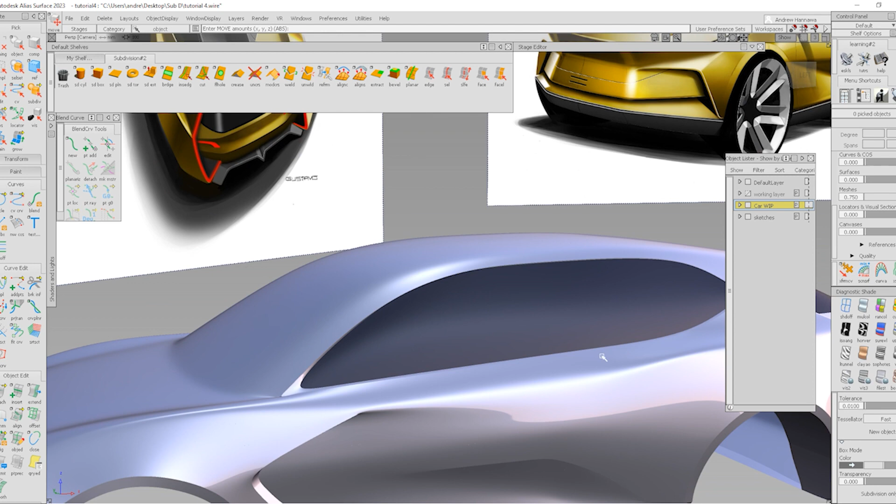Today we're going to add more detail to this model. Now that we have the front, side, and rear blocked in, it's time to add more details. I want to clean up some of the surfacing around this C-pillar sail panel, add this V-shape feature onto the spoiler, and maybe if we have more time, we'll split the glass from the body and add more detail and clean it up a little bit.

Okay, let's start with this sail panel here. If I look at the sketch, it goes to a point and then into more of a round shape here. And if I look at the other one, it does something a little bit differently, kind of goes all the way.

I'm going to follow a solution where I combine both sketches. So let's start, first thing I need to do is...

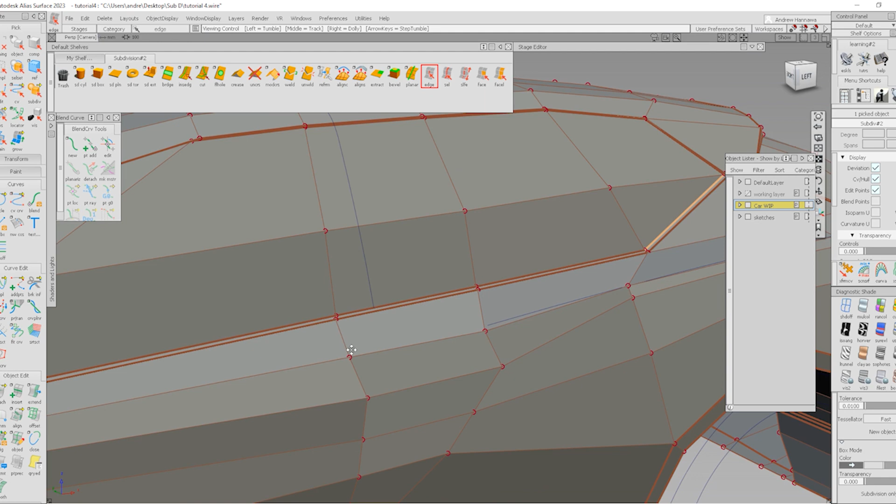I'm going to start unwelding some of these edges. I'm going to unweld this one, and I can unweld this one. First I'm going to just separate these faces from each other. So I'll click on the edge, then click unweld, and that's going to unweld those two edges.

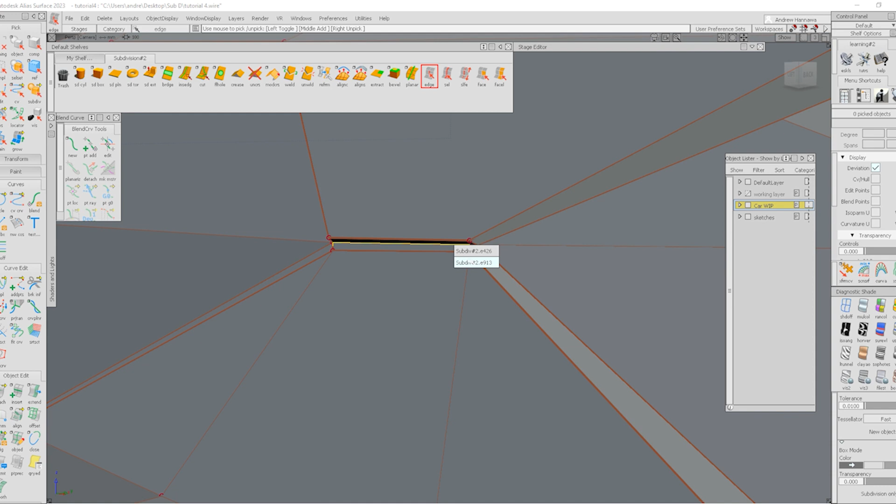And then I can unweld this one as well. Yeah, that's unwelded. And this one can stay. Actually, we need to unweld this inside one right here. Actually, I can delete this surface because that's just a connection between those two, and I can just delete that one. Oop, it doesn't let me. So yeah, we might have to unweld.

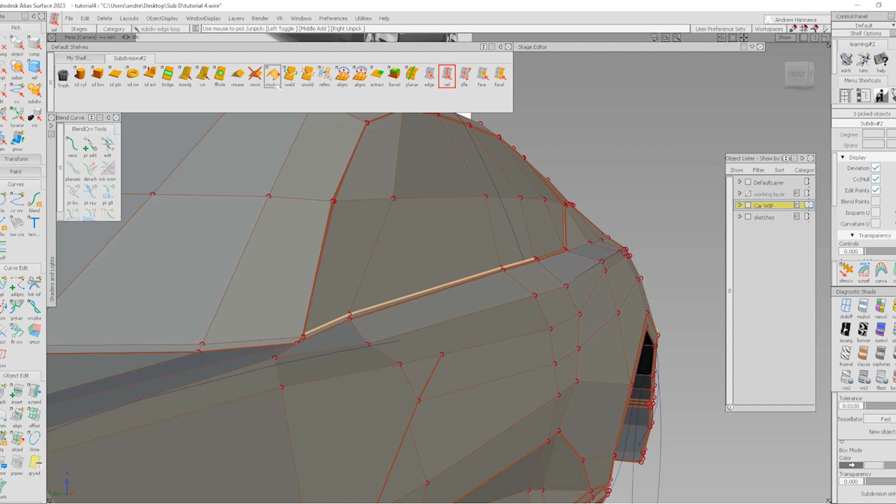Okay. And then I can unweld this one as well, this whole edge. Let's see what is left here. What if I go in here and crease this right here. And I can take this guy here, unweld that, and then I can unweld this one, and let's unweld all of this.

Okay, I can delete this edge loop, don't really need that. Alright, that is not what I want to do. Just delete this one, and then delete this one.

Now I'm just cleaning this up. This one here could go from here to here. Then I can get rid of this one and this one. Why is that not—oh, that's just that one. Okay, then I can crease this one.

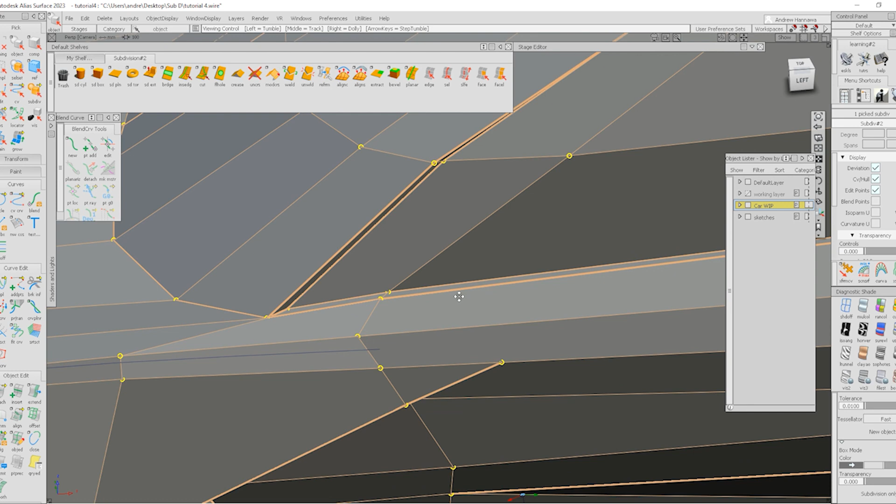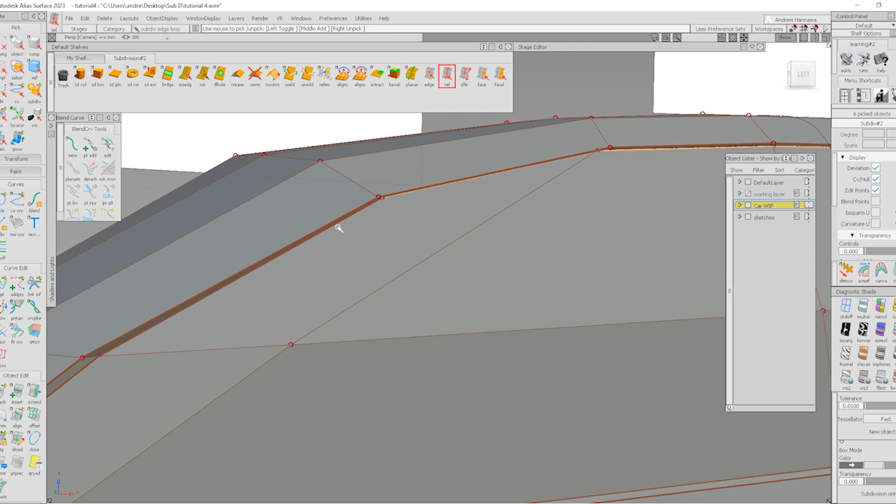So let's see what actually is still welded together. I'm trying to separate this so it's easier to work with. And then I can unweld this guy and this guy. Okay, that should go all the way there. Unweld this one. Okay, that is meeting with this one, which is unwelded. And there we go, that is now its own part.

Yeah, I can hide it for now. And then I can go in and select this edge loop right here, and I can unweld that as well. And that is now its own part. So if I look at this and this, now the glass is its own separate part. The reason why I did that is to help me get this part to be cleaner.

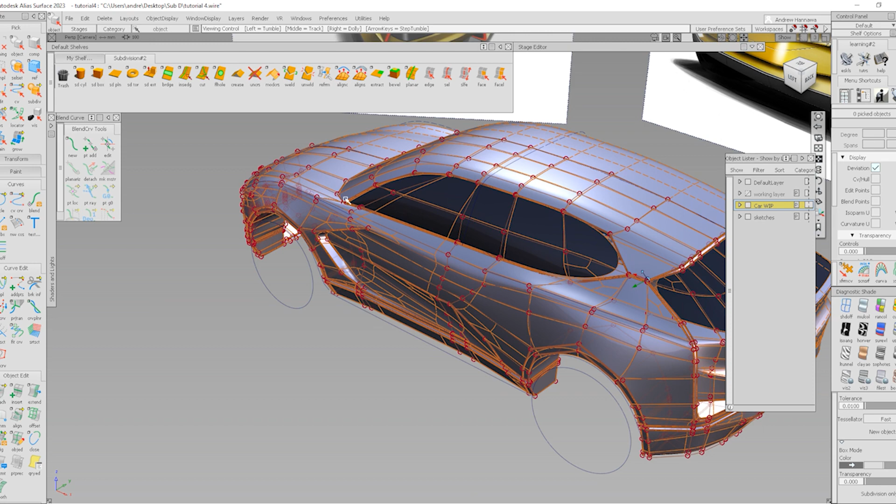So what I'm going to do now is work on the body. This part is not yet unwelded, but I can unweld it. I think this edge is not unwelded. This should be its own part. Yep, this is now also its own part. So now I can work on the body separately while I keep the glass clean.

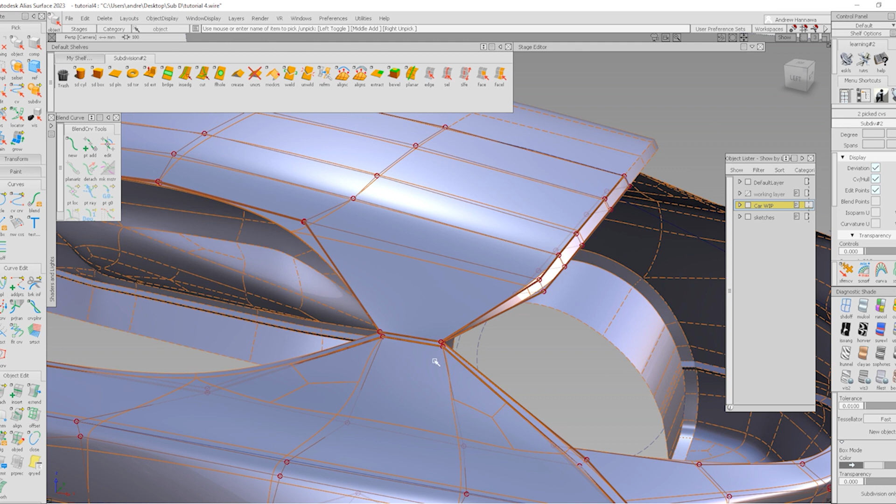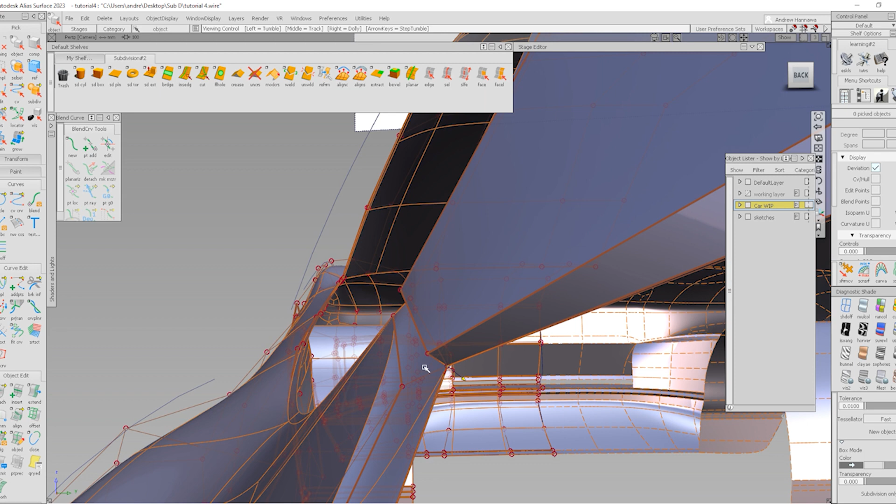Okay, that is strange here. I can push this down. I don't know what happened there. But okay, so first thing I'm going to do is start working on this sail area. Now I can add more shape here. I'm going to select this edge loop and then uncrease it. But because it still comes to a point here, this point wants to stay sharp while this one becomes more soft. So what I'm going to do is select all of this.

It shouldn't all get selected. I'm going to delete this face first. And now I can select this edge that connects to the bottom one, and then this one. And then I can select all the way down to this one.

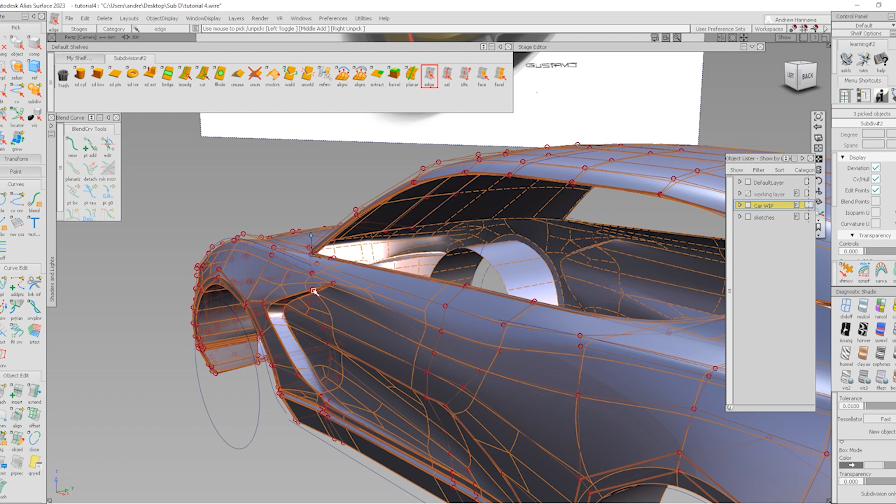And now I can extrude in Y and just go in like that. It doesn't really matter as long as I hit the glass, which I should be. And then I can crease all these edges over here.

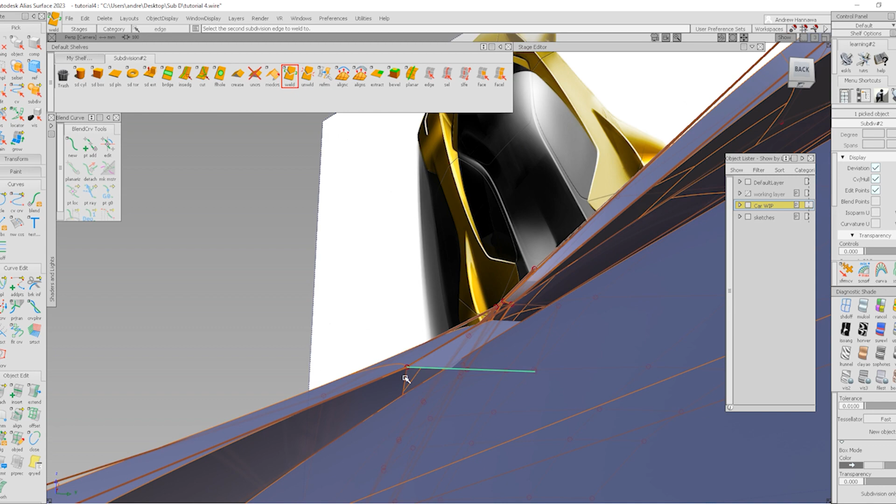Okay, and now I can weld this edge back to this one. So I'm going to select this edge. Oops, that one, and then I'm going to weld it back, this one to this one. Okay, and that should give me something like that. If I bring the glass back, it should look something like that.

Actually, I can connect the glass together now, so that doesn't leave a gap over here. So I'm just going to insert an edge loop right here.

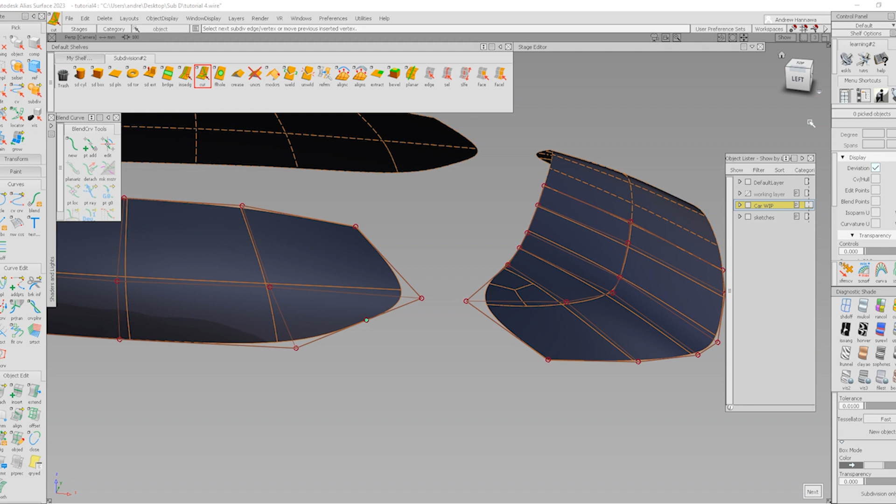Okay, and then I can just create a four-sided face, and I can push that to place, and then I can do the same thing here, create a four-sided shape, and I can also do the same thing here. Now I can connect this one, this one, this one to this one, and then just bridge between those.

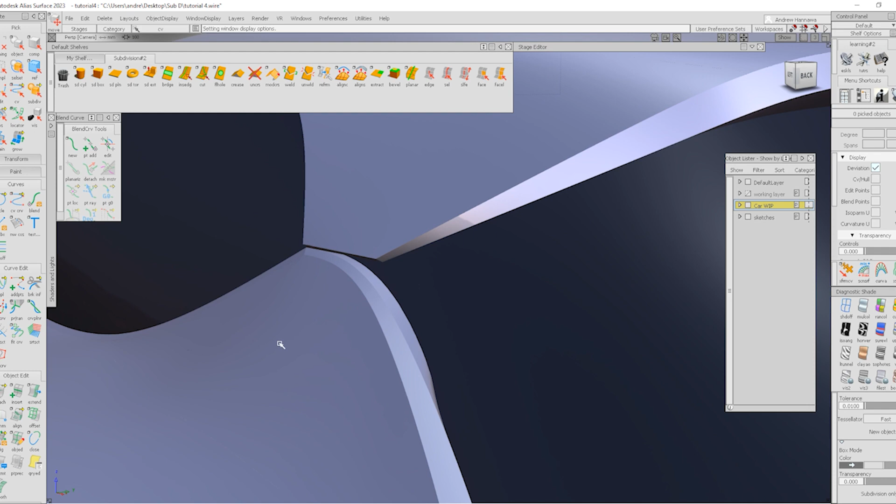And just like that, I bridge between my glass. I can push this point in so it's not protruding. And now we don't have a gap like that over here. Okay, we can push this point further in.

Okay, so that intersects the glass. Yeah, we want to be intersecting the glass.

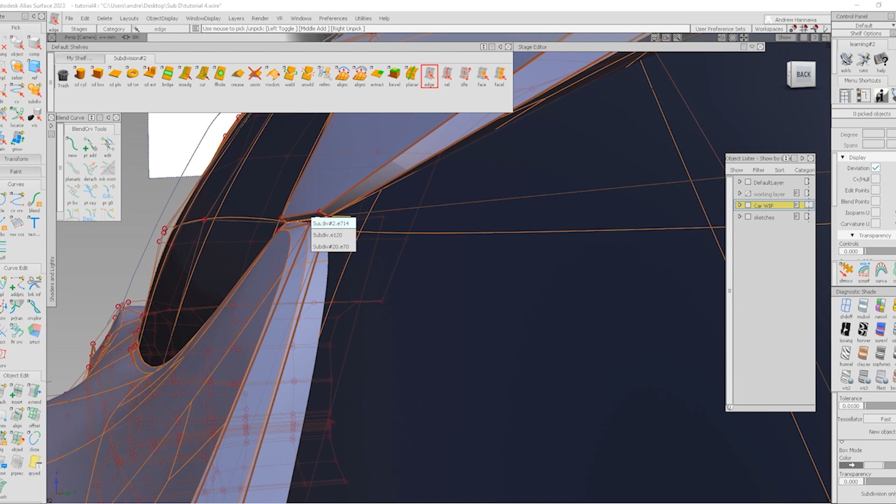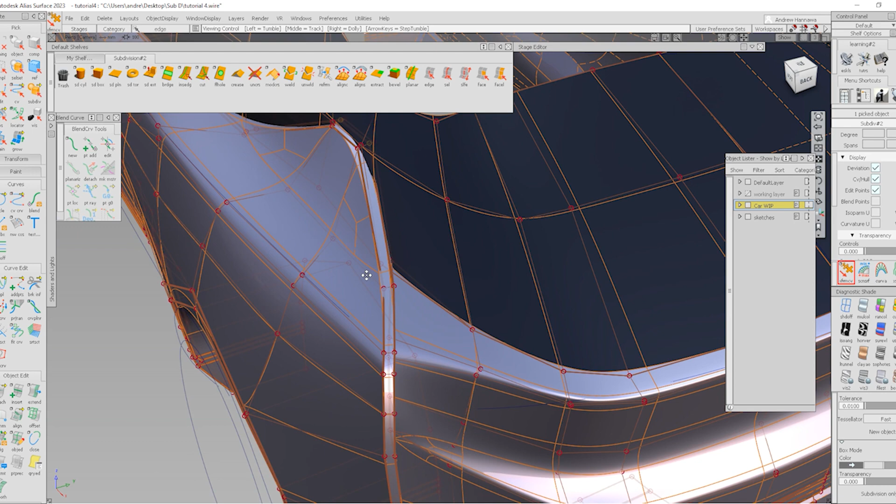I can hide this one so I can select better. And I will now move this one inside so that it intersects the glass. Pull it like that. Okay, that's better. Okay, and that I think is a little bit too soft, so I can just insert another edge loop right here.

And then I can move those CVs to get it closer to what the sketch is doing. Okay, that is starting to look better. We can fix the plan view now. Move that inside a little bit. Okay.

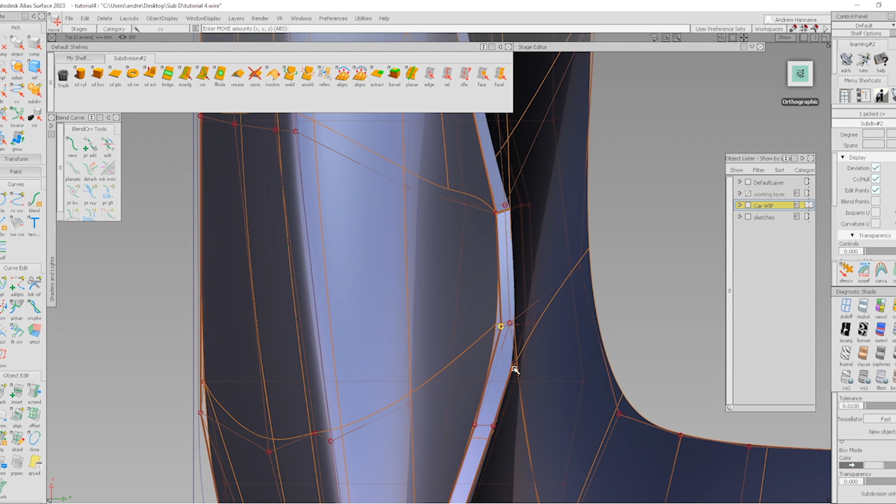Okay, now if we bring in this, it looks like it just intersects it. So, gonna do that now. I can grab, well, let me turn off this one and this one so that the CVs are not in the way.

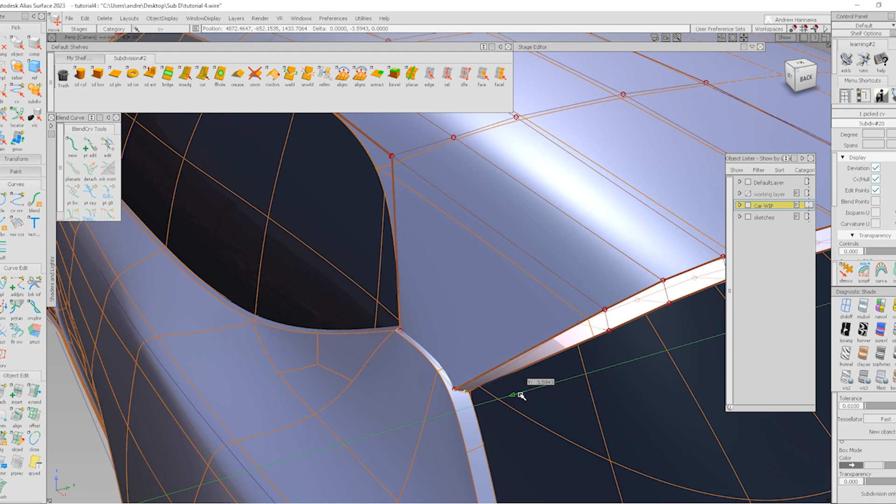It comes off and it just intersects it just like that. Same thing here, and then just intersect it like that. Can push it a little bit in Y. Push this point in. Okay, that's like that.

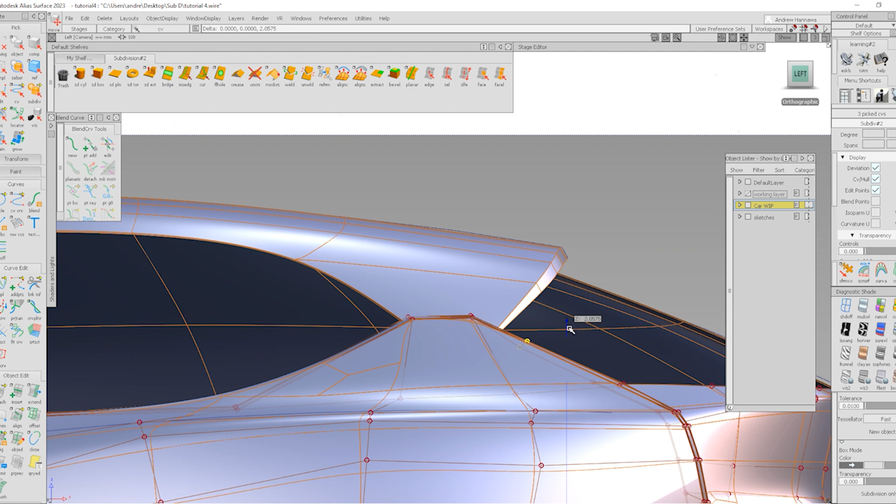I think the sail needs to be a little bit bigger too, so I'll turn off this one, and I can turn off the body, and I'll push this one a little bit up to create a little bit more, make the sail a little bit bigger, more substantial.

And I would have to move it in a little bit too. It's starting to be too thick. Remember, the glass curves in as it goes higher.

One thing I want to adjust here is this slope here. Looks like it has a little bit... the sketch has a faster shape, so I can just move this one using the slide tool. Get a little bit of a faster shape out of it. And then do the same thing for this row of CVs.

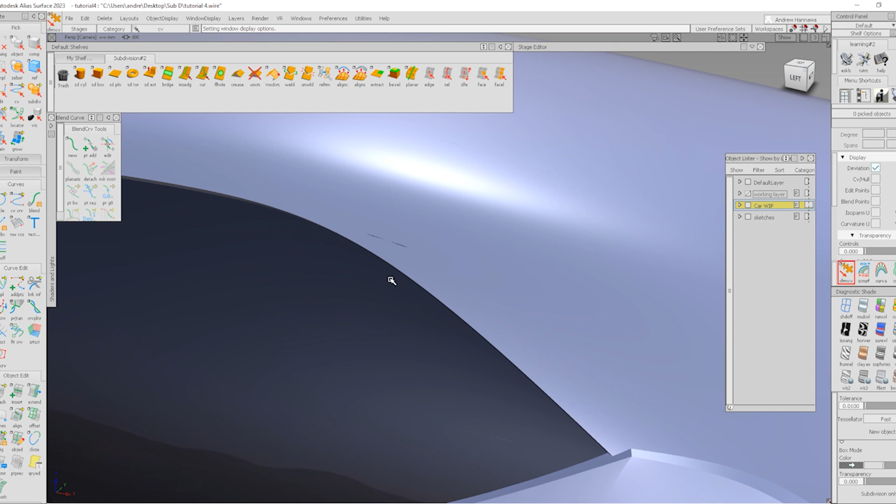Okay. How's that? That's looking better. My glass can move in a little bit. Okay. Alright, yeah, I think we got the sail looking a little bit more accurate to the shape of the sketch.

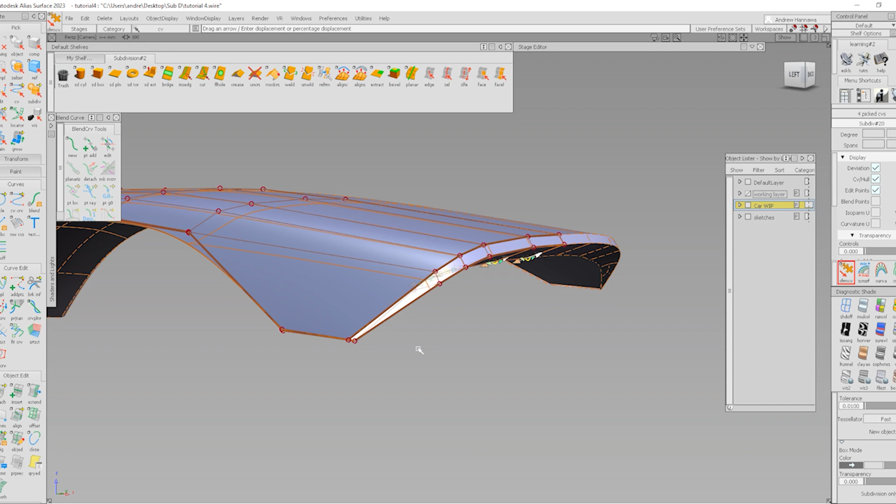Okay, now we can add this V shape. And this V shape is actually pretty easy. All we have to do is bring in, we can leave this inside part the same, so we can actually extend that kind of to go further into our glass, and then we can just change.

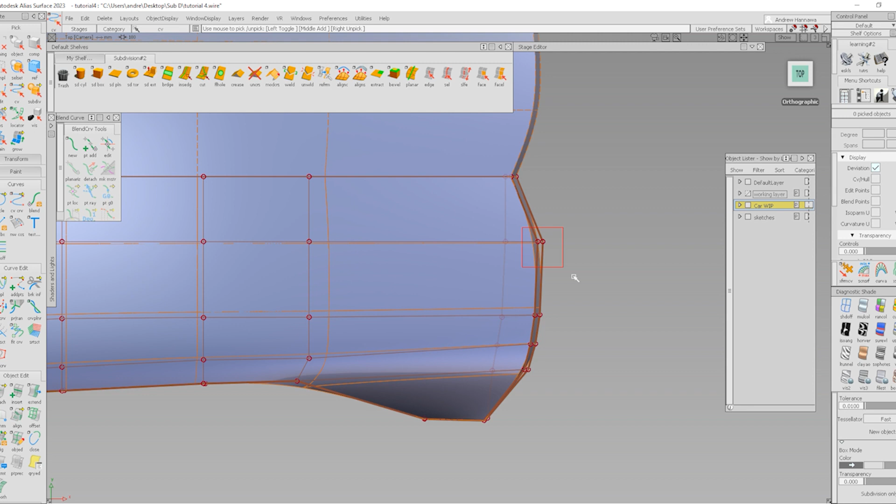Now we can actually break symmetry. Remember, we had this edge loop being the symmetry edge loop to keep it curvature continuous through the center line. We can break that because our sketch allows us. This is one of the rare designs that lets us do that.

I'm actually gonna crease this line here to create our rail. So yeah. And here I'm just gonna try and get more of a straight line, just like the sketch is doing.

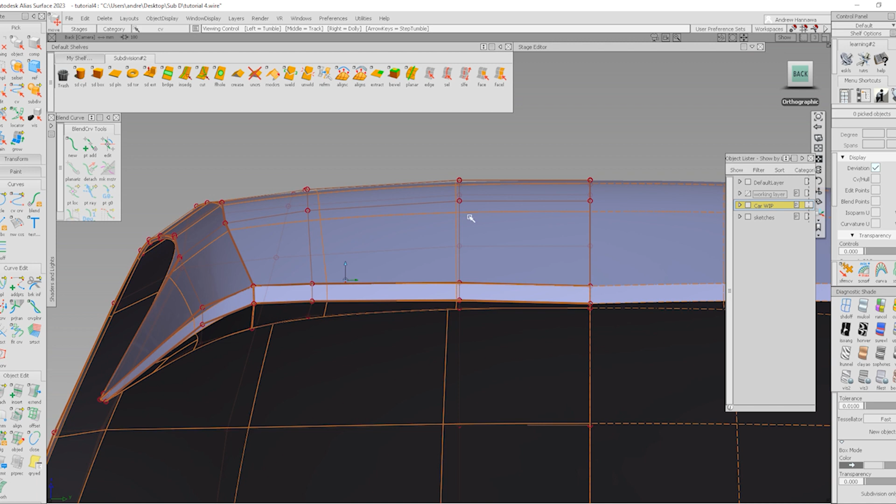Then I can do the same thing in this view. Select the CV, these two CVs, and just push them down. Do the same thing here. And these two as well. Can also, let me see how that looks.

Yeah, it is intersecting with our glass there. So we can actually push the glass down too.

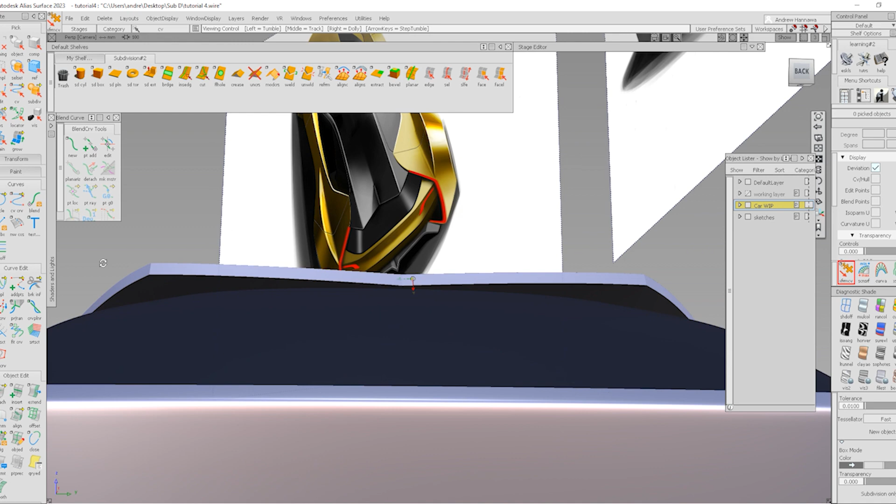I'm just hiding and unselecting so that it is easier for me to work, so I can see better and select the CVs a little bit easier. That's what I'm doing. Okay, that looks better.

Maybe move these CVs as well. I can go in a little bit further, push these CVs down to get that crease to travel a little bit more.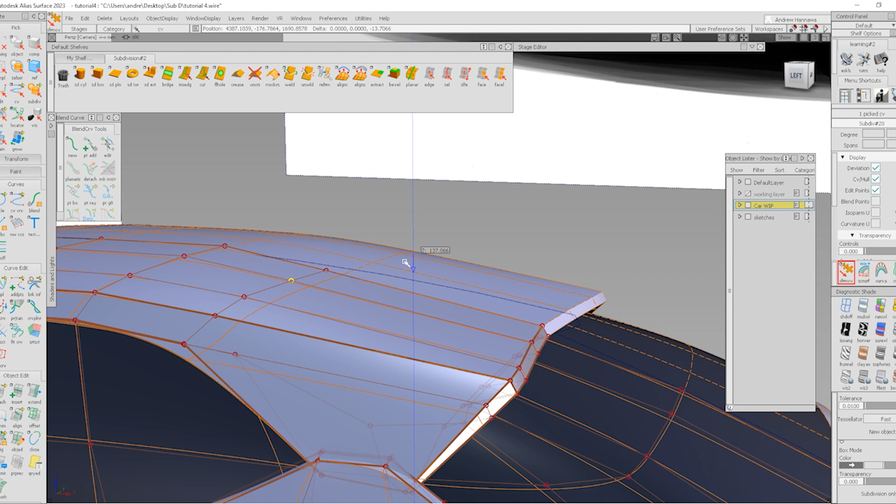Let's see how that looks. Yeah, that's better, looks more like the sketch. It just kind of fades out.

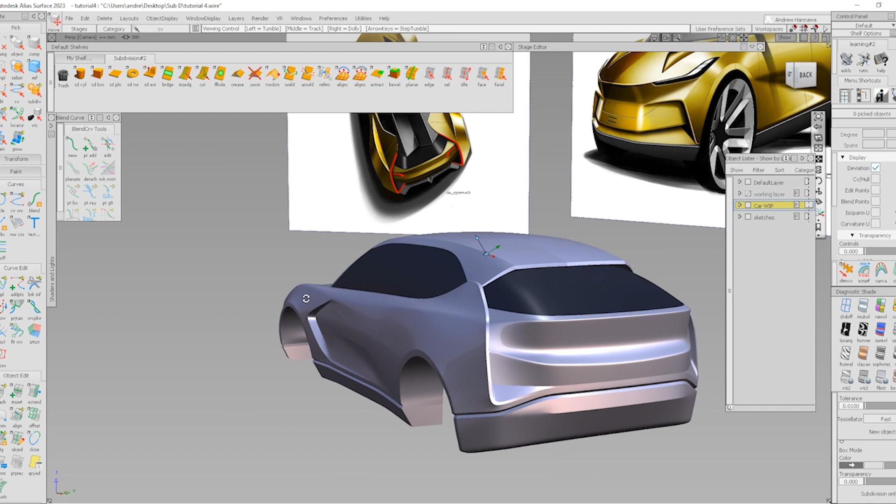Okay, so it looks a bit flat through here. So I'm going to isolate that, and then add an edge loop here. Then I can select these CVs and crown it just a little bit more, to get a little bit more of that crown shape we had in the roof, because it is starting to look a bit too flat.

That is looking better. We can use these edge loops later to control more of the crown of this surface. But for now, we can select these surfaces here on top, and then turn them into glass color, just to help us visually.

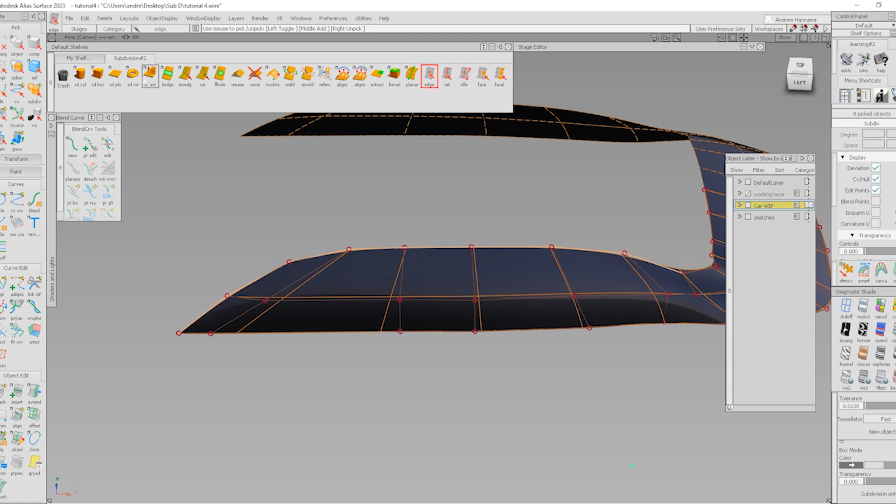If I look at my glass, it looks like it is protruding here. So to solve that issue, I can grab these edge loops here, hold shift, middle mouse click to drag select, and extrude in Y, and increase these surfaces, and now I can get that round shape back. This isn't necessary, it just helps us see that the glass is not protruding.

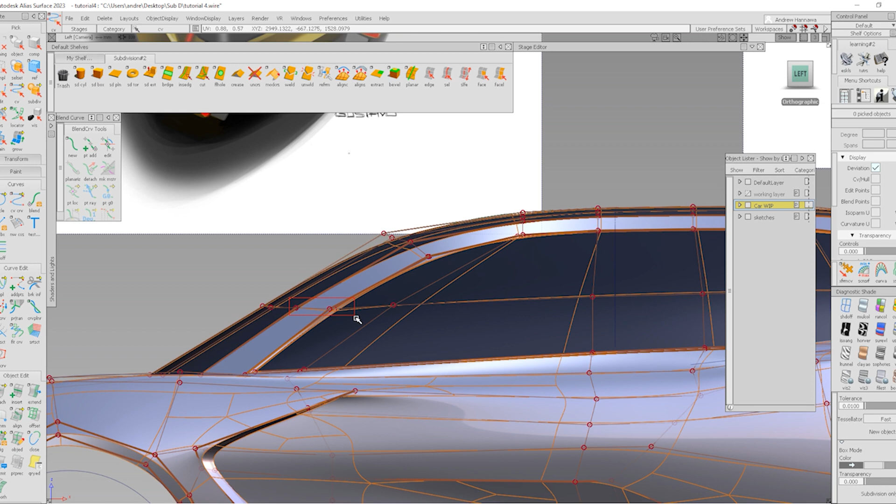I can adjust this a little bit. When I'm doing work for the body side or this rail, I want the glass to be selected as well, so I can drag select all of these CVs together, so that I'm affecting both and the shape stays close.

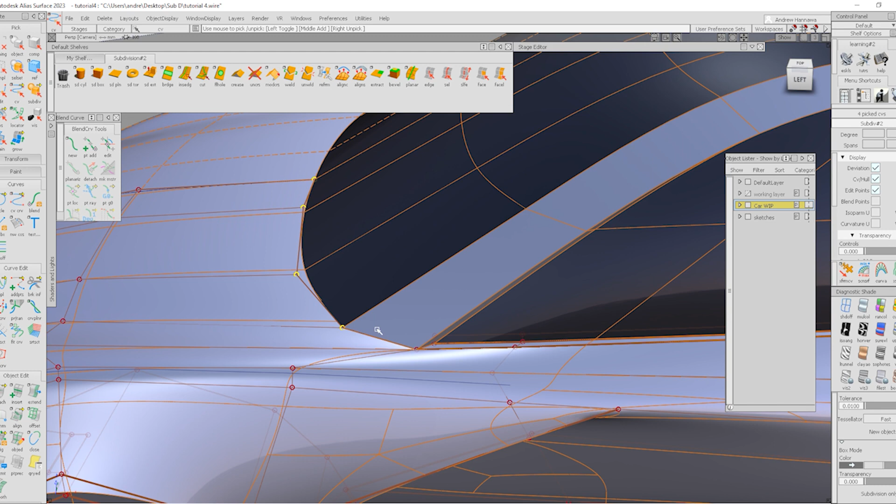Now I can turn off this and this, and either isolate my body side, but if you don't want to isolate, you can just work while this is visible. I'm going to select these CVs over here and drag them away. This is to create the cowl area.

I'm actually going to isolate now, and select all these CVs, because this is not supposed to have like two steps like that. So I'm just going to drag these down, just to get them more leveled, like so.

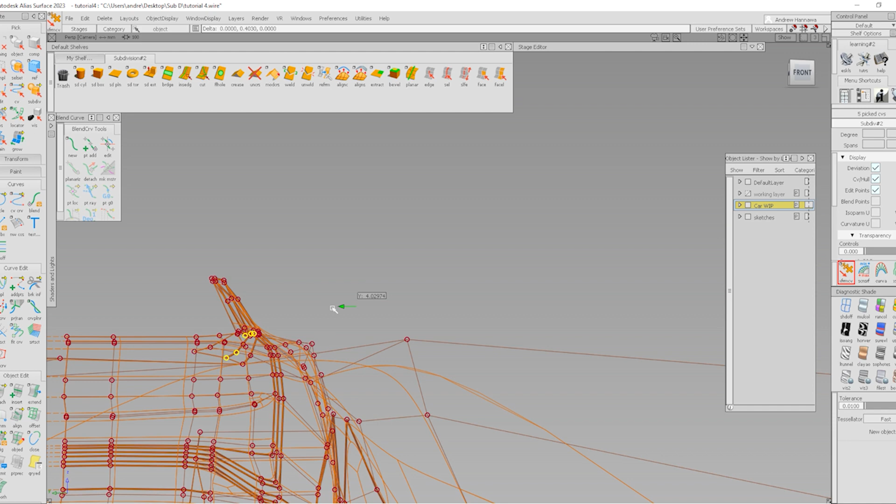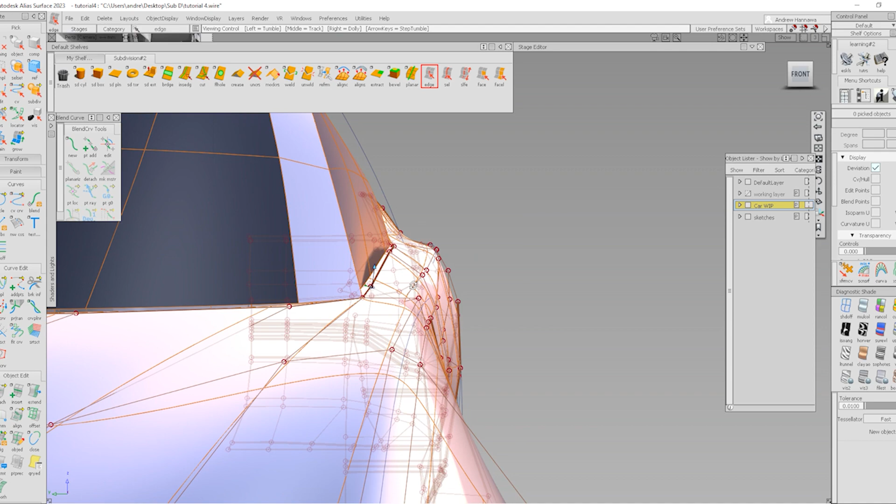And these don't really need to be creased anymore. That looks better. We're going to eventually edit that out because it needs to connect to the front fender over here.

Okay, so let's just add the cowl. I'm going to select this edge, this one, and this one, and I'll use the extrude tool. I can extrude down and in X, just like that.

The CV can actually slide back a little bit, doesn't need to go that much. Then I can crease this like that. And now I can turn off the model, the main one, and grab my glass here.

And I can select these CVs and extend them just like that, and have them intersect the cowl area there. So that's an easy way to separate that. Most cars have like a gap, a cowl gap. I'm just going to have this like a surface here. This is where your wipers go.

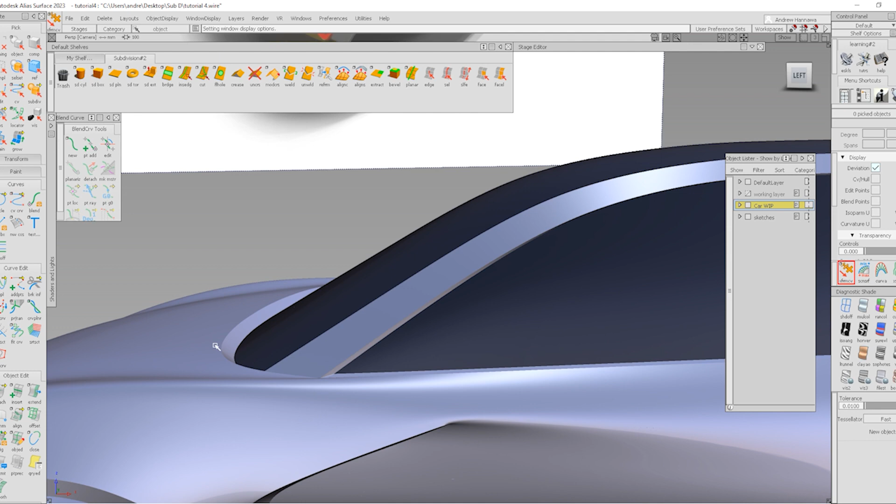Okay, the rail is looking a little bit flat, so I'm going to fix this first. But I can add another edge loop here, and then I'm going to isolate. I can pick by hull, and then move the CV according to the UV and just add a little bit more crown.

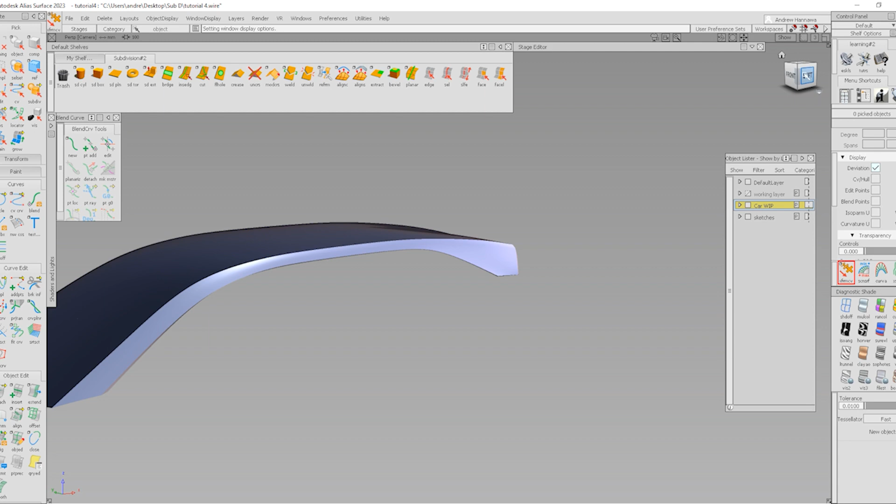Okay, that is looking better. Yeah, see, that is adding more crown. Okay, that looks better over here.

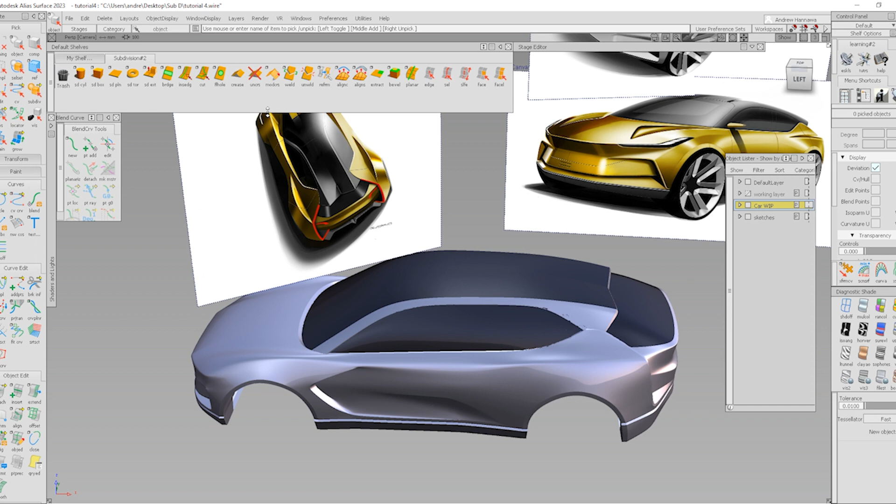Now I want to move into cleaning up this area right here. And it actually involves connecting this C-pillar sail into the front fender. If you look at the sketch, it goes from here all the way to that front fender line. This sketch does the same thing. So now I'm going to connect those two.

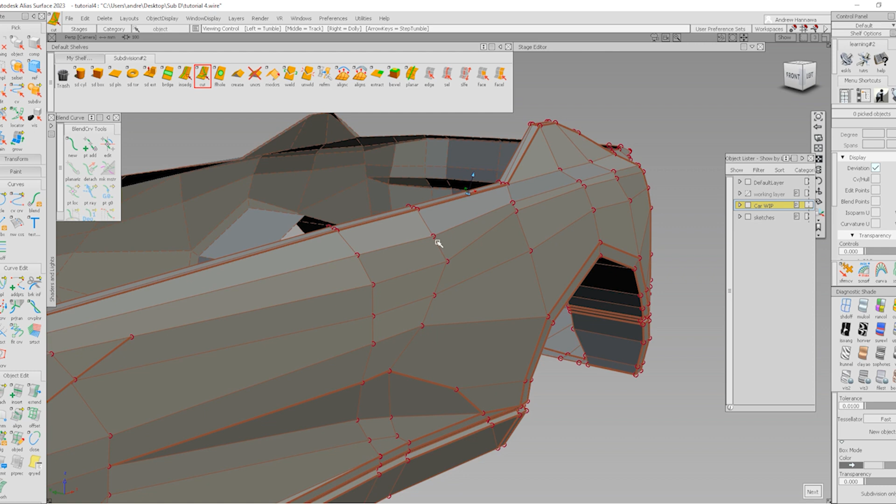So I'm going to turn on the model, I can isolate, and I'm going to go into box mode actually to see easier. I'm going to use this edge loop here to connect to that one. So I can snap to this CV using Control, and then snap to that one like that, and then I can now delete this edge, don't need that anymore.

Let's see if I think this feature can be lower, so I can delete this edge. I can delete that one too, and then crease that one. What if this edge attaches to that one?

This one can go somewhere over here. I can delete this edge, and then this one can attach to this one. Let's see what that looks like. That's actually looking better than what we have. And then I know it's a little wavy here, but let's just fix it.

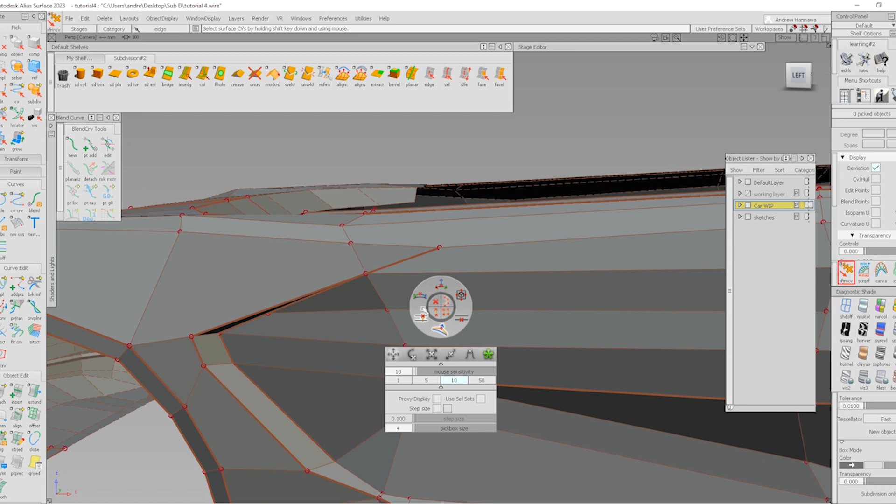I wasn't trying to concern myself with the body side yet, because that's going to be its own separate video. But let's just edit it real quick here so that it's not causing us some bad reflections.

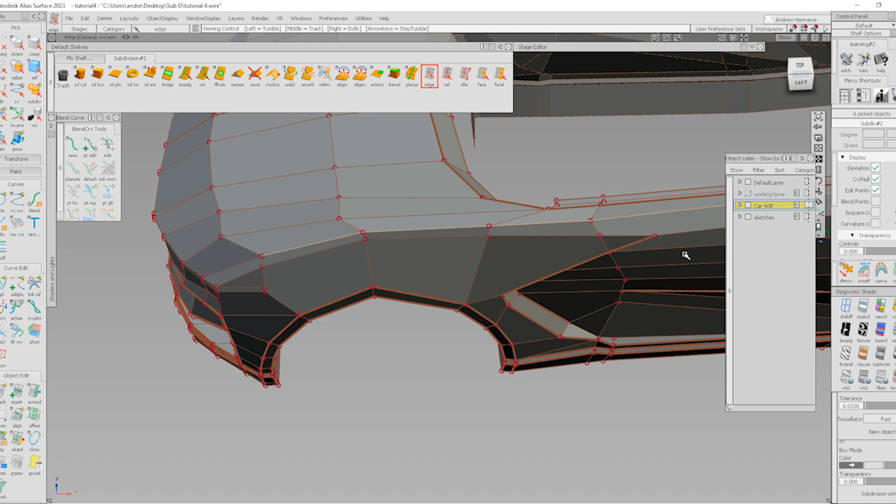Okay, so going back into this line here, I can crease all of this from here to here. And I can get rid of this. Let's see, let's get rid of all that. And what if I bring this one over here?

And get rid of that. Oops, get rid of that. See what that looks like. Yeah, that's looking better. Okay, so now that that is all one line.

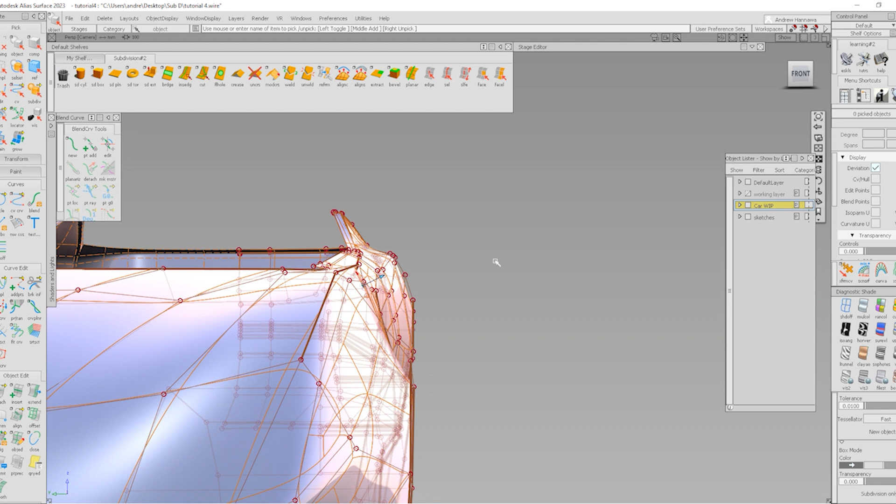I have two options. I can go in and edit this CV one by one, or I can, let me just bring these down, they're bothering me. Or I can create a curve from here all the way to here using NURBS and then align to the curve. So that's what I'm going to do.

I'm going to make a really clean curve. I'm going to snap it to here. And I'm going to go into plan view. And then let's just...

Go somewhere over there. Now I'm going to bring in my sketches. So yeah, it goes somewhere towards where, like a third of where the front is. Okay. And then...

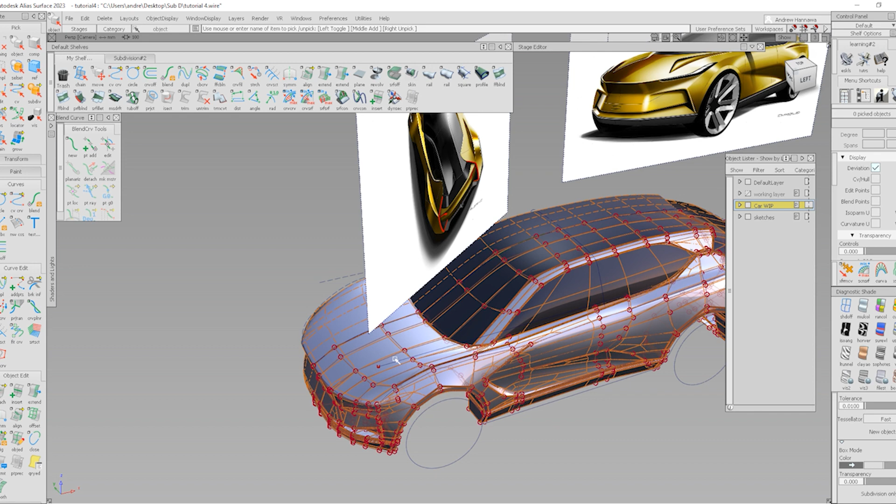Now I can select these two. Let's isolate, turning off the model first. Bring this curve down over here maybe. Now I can add some CVs to this curve.

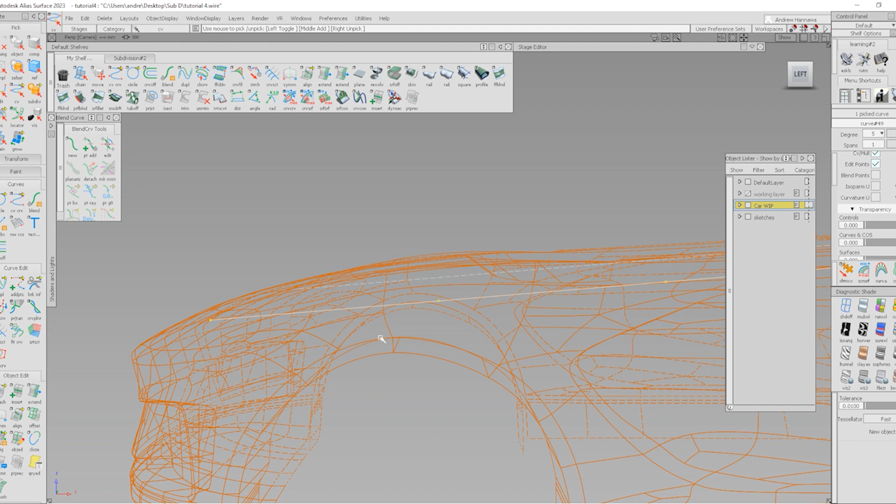Okay, and I can start adding a little bit more shape. The reason why I'm mixing in some NURBS here is because it is cleaner, and also our objective is to be faster. So this is faster than moving one CV at a time in Sub-D. Sub-D is generally faster, but not really for cleaning up really fast, so this is a good alternative.

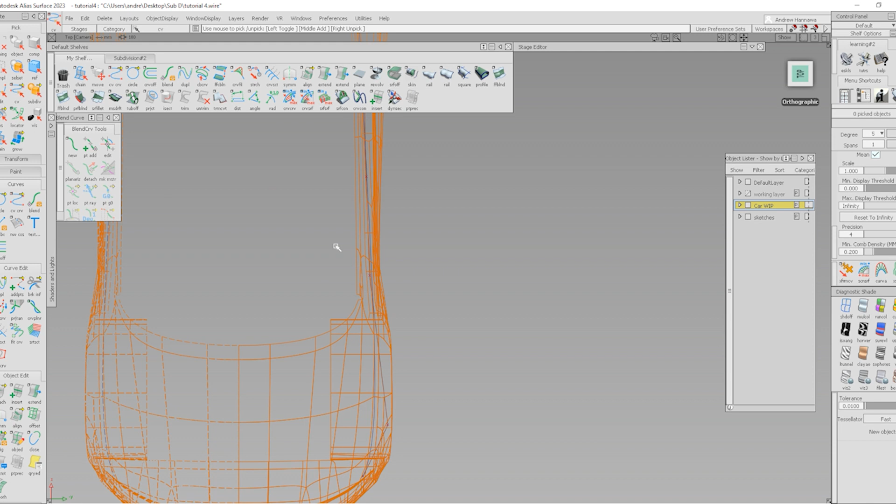So yeah, I'm just making the curve kind of like a nice sweeping curve. I can isolate it by itself and just look at it to see if it's got a good curve to it.

Okay, let's look at it from here. Yeah, it's looking a lot better. Okay, now I can turn my model back on, and using the align to curve tool, first I'll select the CVs that I want to align with. Oops, that edge needs to be creased.

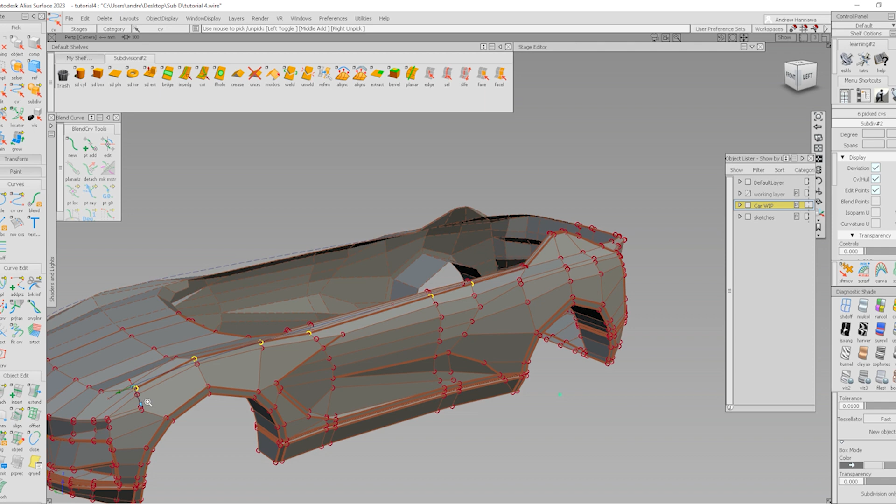Crease, and this one needs to be deleted. So yeah, I need this CV and all the way to this CV. And now I will use the align to curve tool. I don't want history, and then align to curve, and then I will pick the curve. Just like that. And now I've aligned all these CVs to my curves just like that.

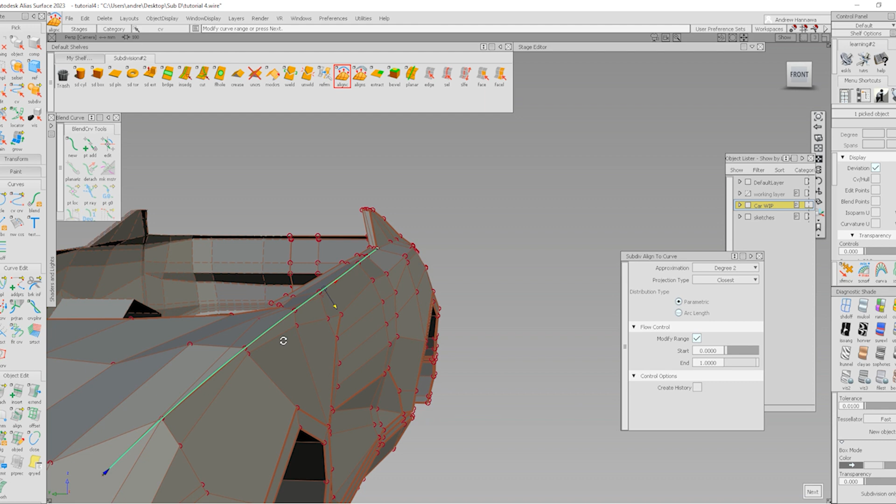Now I can delete the curves, no longer needed. And then I can go into my Sub-D now and just start editing that by itself. Okay, so let's take a look at what that looks like now. So yeah, we created a nice line here that connects our C-pillar to our fender, just like the sketch does.

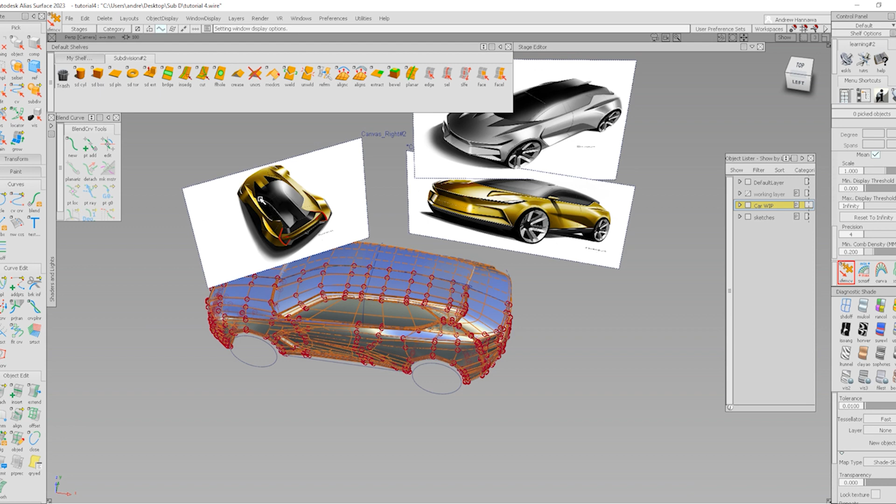Okay, and now I'm going to edit it a little more. I'm going to create this other crease that goes into the hood. I can use this edge to continue that crease because it kind of has a pretty sharp turn here.

Not as sharp as this, but let's edit that. You can go a little bit more outboard. Actually, we need to go a little bit more inboard like that. Okay.

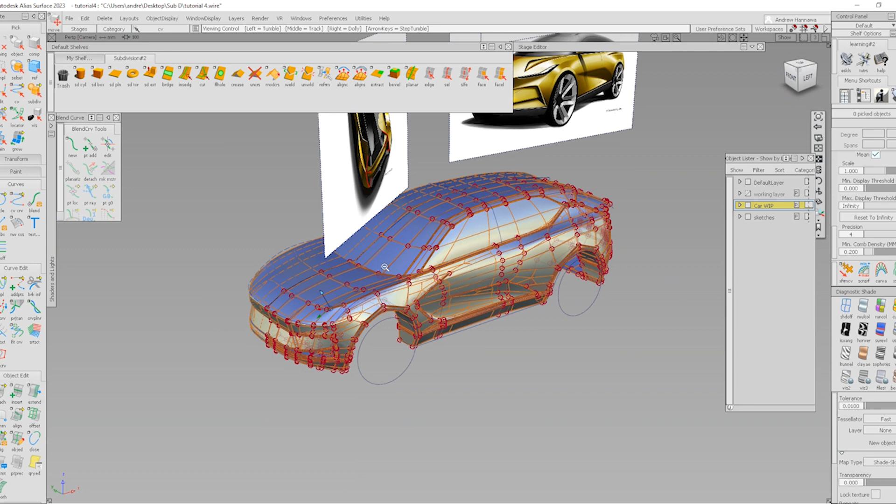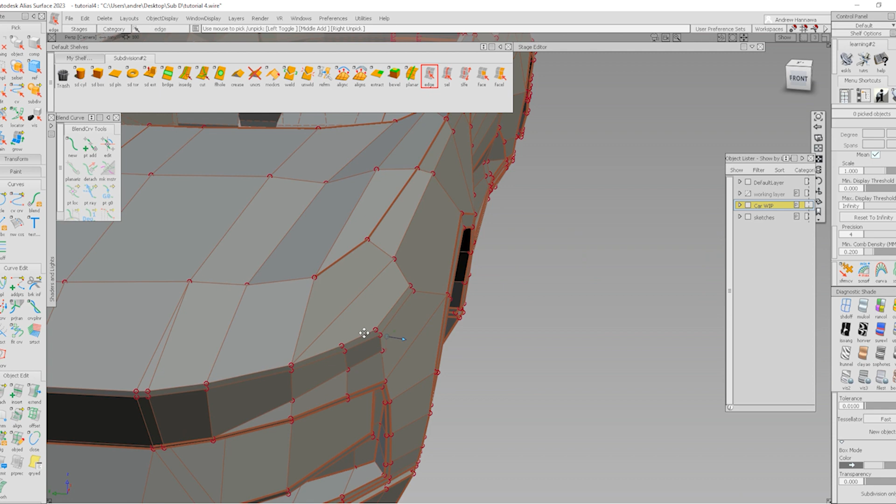And then it looks like here it goes inside like that. So I'm gonna isolate. Let's see, this doesn't need to go, we don't need that, we can go in like so. We can delete this one. And it looks like it goes in like that.

These points can come forward a little bit. Whoops, actually this one can come forward by themselves first, and we can bring these two. The reason why I'm doing that is to get a little bit more space here.

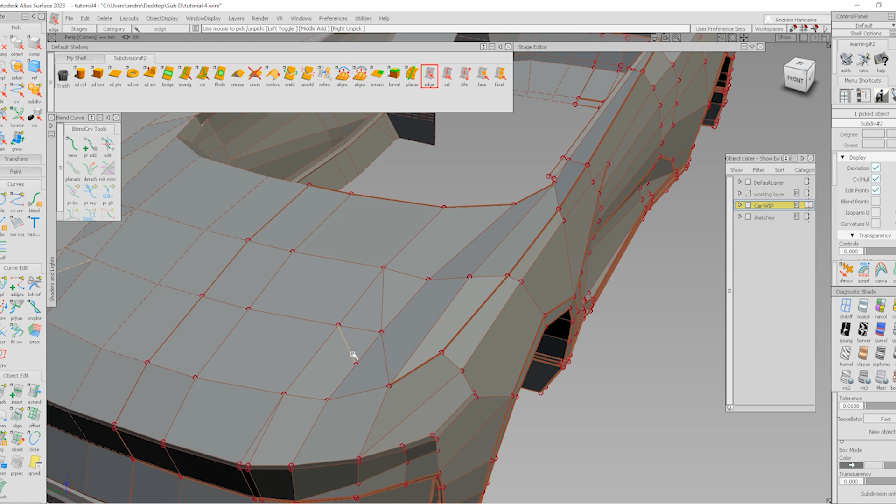So now I can add another one here, and that's going to connect to this one. I can delete that one. Let's see what that looks like. Yeah, this can move down. This can move this way. That one can move this way. And I can move these down as well. Okay, alright, now let's see.

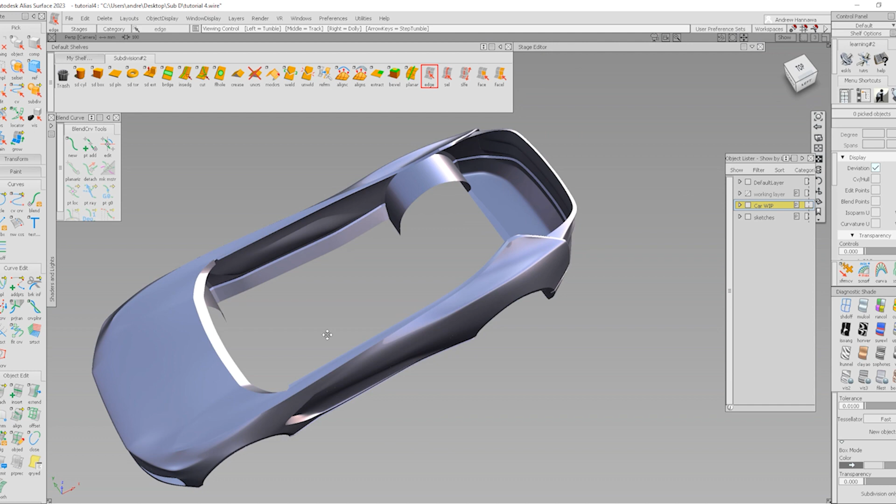I can create another edge loop here, and that will add a little bit more tension to this area, make this crease a little bit sharper. I don't need this one and this one. So yeah, just creating that bit over there.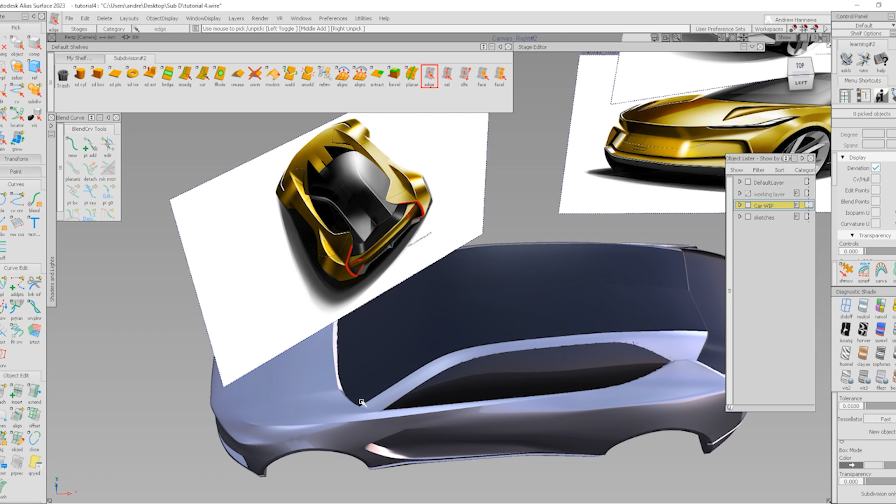I'm not following this one, I'm kind of following this one more when it comes to the hood. Okay, it looks like it's closer to the A pillar rail. So I can move that now. Go in plan view, I can move this whole thing in Y this way.

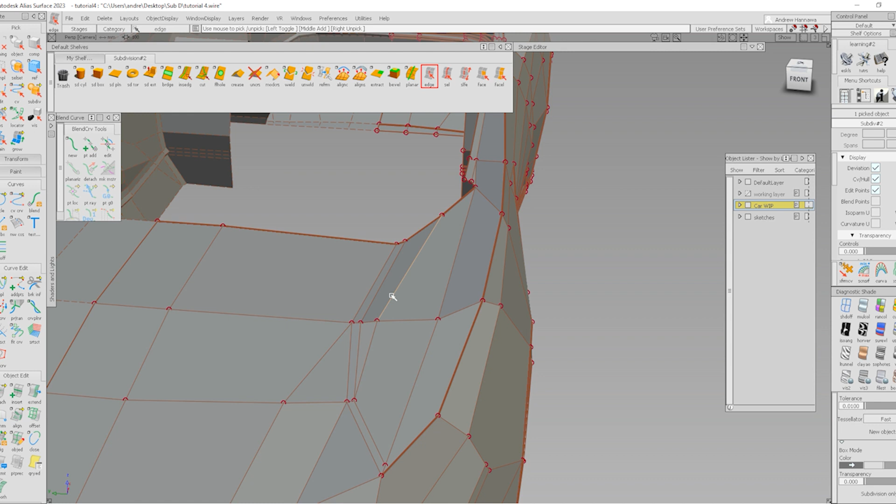I can get rid of this one. Let's see. Let's get rid of that one. This one can go over here instead, and I can get rid of this one. Alright. This can come forward a little bit.

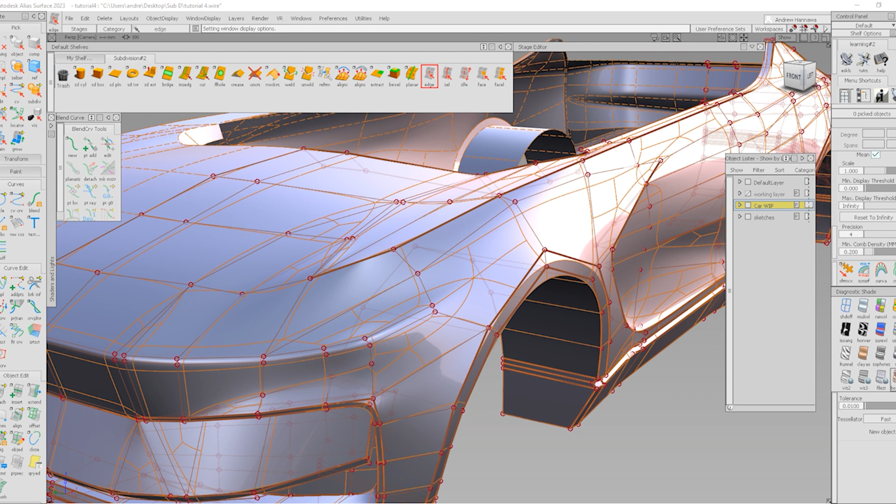Okay, let's see what that looks like. It's a little bit better. There's something weird going on here. Can perhaps bring this to a point so that we don't have some complications here. We'll add a little bit more detail here later. Maybe we can add an edge loop between these two here.

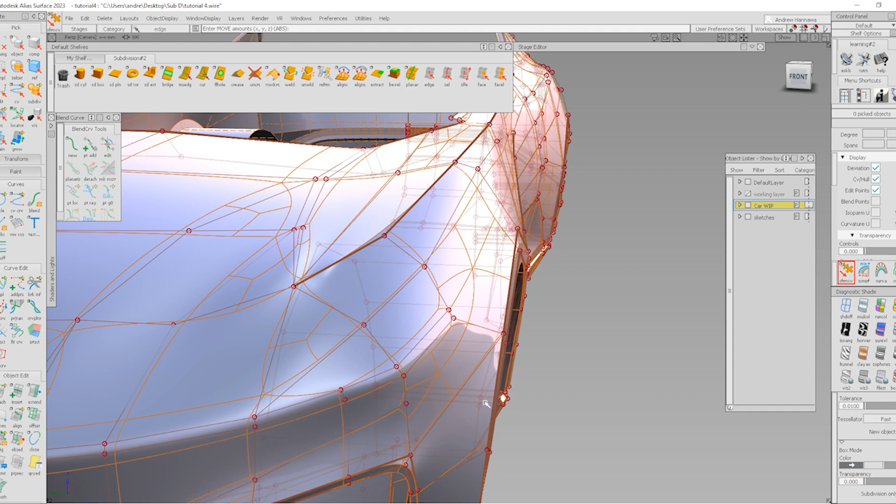Yeah, that looks better. Okay. Now, instead of creasing it, I can also insert an edge loop here, really close to this one. Okay, and that is going, you have to be aware where your edge loops are going. It's going all the way around, which is okay.

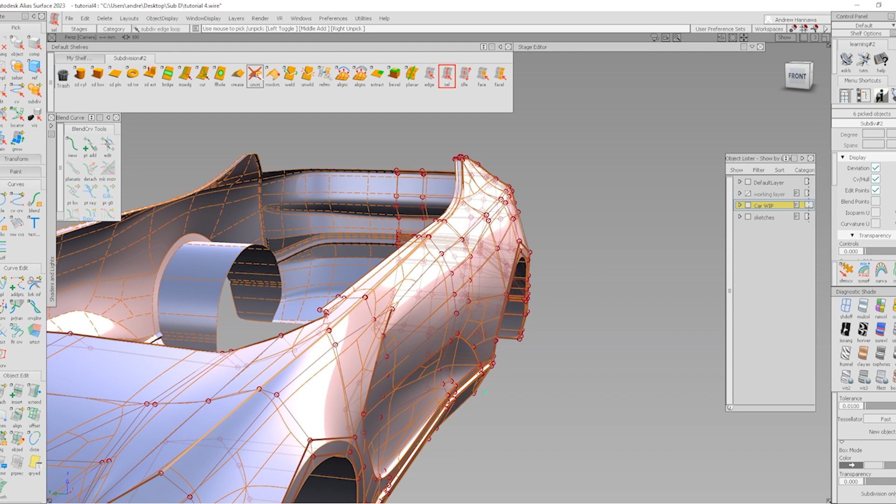Don't mind that. And then I can select this one, and I can uncrease that, and can also uncrease this one. See, our edge loop looks like it stopped right over here, so I will continue it by using the cut tool. Come here, and then I can come here.

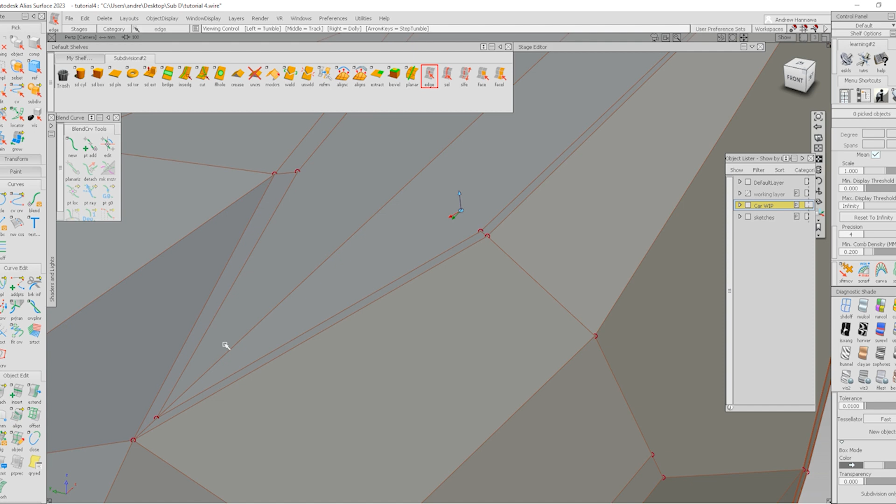Okay, connect this one to this one, and then I can connect this one to this one. Okay, now I can get rid of this one, and now I can connect this to this, and then I can delete this one. Makes every one of these faces a four-sided. So that's going to be a little bit of a cleaner solution. That looks better.

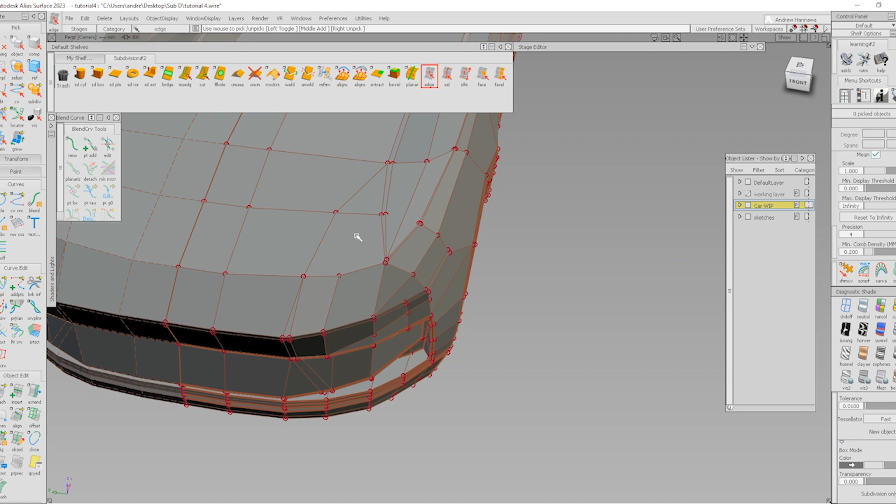Alright, I don't like how this one goes into this one like that, and same thing for this one. So I can just delete this surface, this edge right here. I can delete this one. And maybe move this one over like that. This one as well. And I can insert an edge loop here to make it a four-sided.

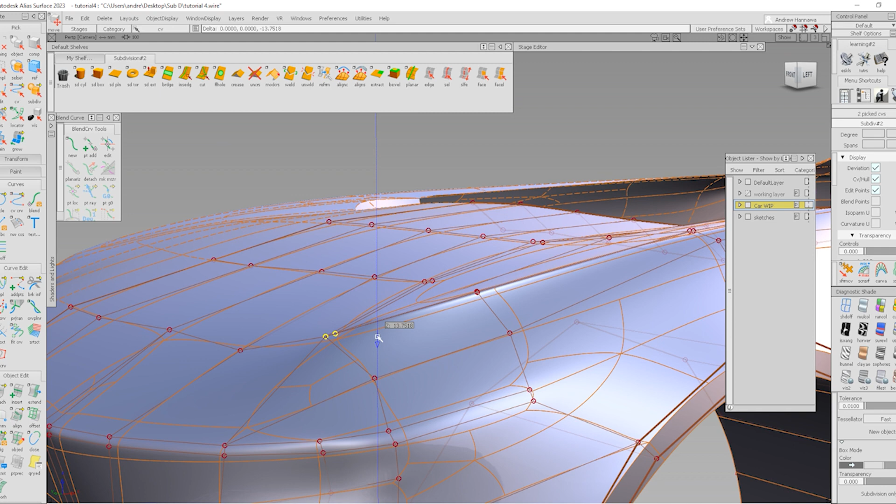Same thing here, connect this one to that one. This one to this one. And then I can add a little bit more crown here. Alright, let's see what that looks like. That's looking better. This could come down a little bit. Yeah.

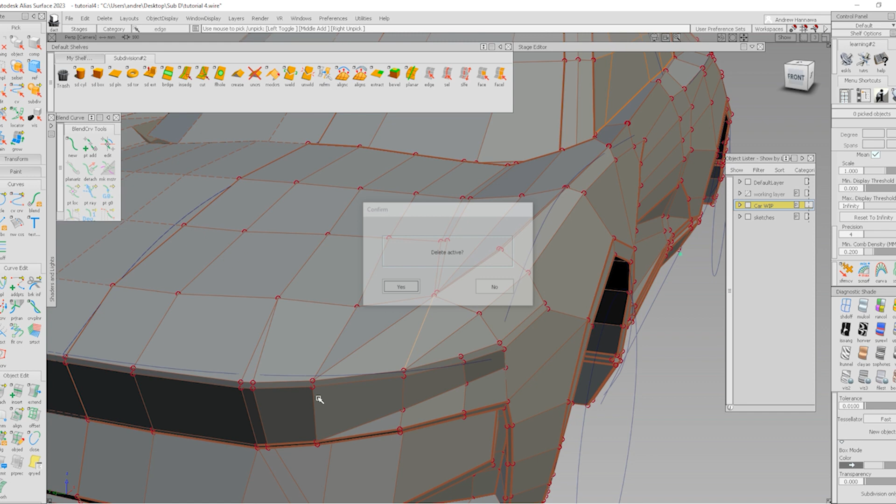Alright. It looks like it goes in and almost meets with this point right here. So actually what I can do is go more like this with it. I can delete this one. Maybe I can go even further in like this with this one, and then delete this one and this one. Okay, oh, looks like we have some abnormalities here.

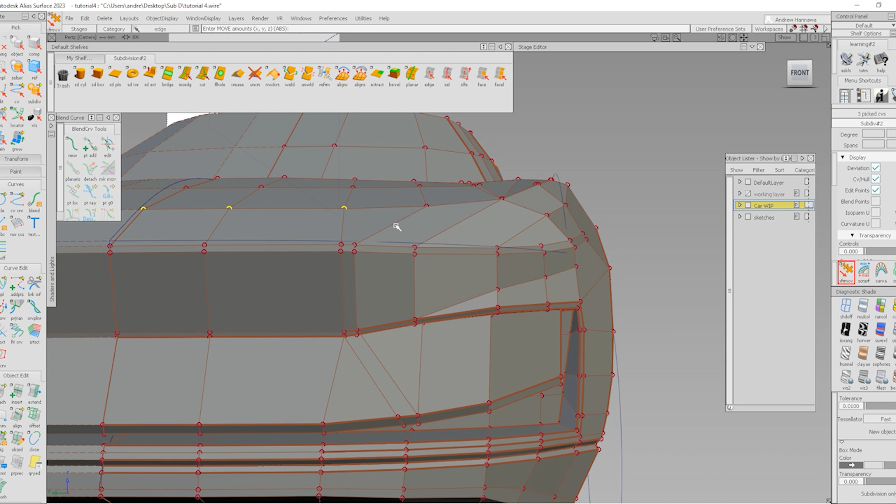This one could go up. These ones can come down. Okay, let's take a look at it. Yeah, it's looking better. Kind of connects it to this, but it fades out right here. Okay. This could come down. Yeah, it makes this a little bit more apparent, just like in the sketch. Yeah.

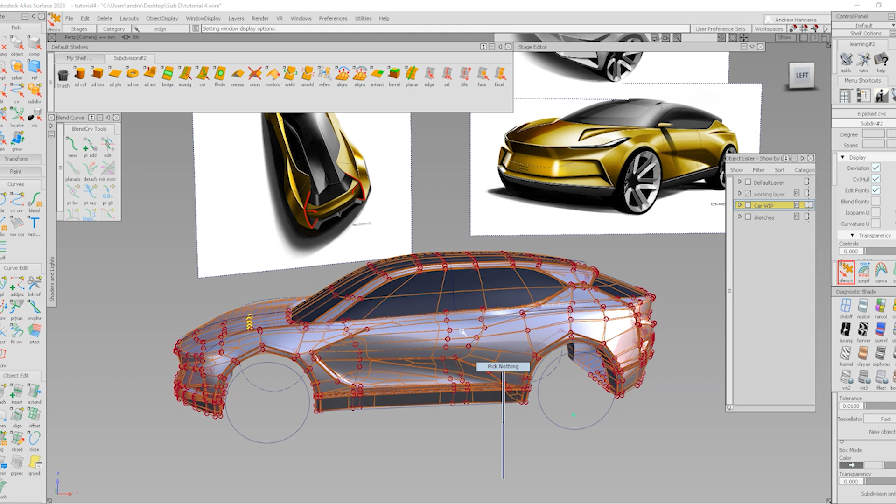So we got that glass separated from our body. We got the sail panel, and it's, yeah, the details looking better. It's getting a little bit more accurate to what the sketch is doing. Maybe what I can do is add a little bit more crown to the cowl area. And that's the last thing I'm going to do for the video today. We'll get into more details on the body side in the